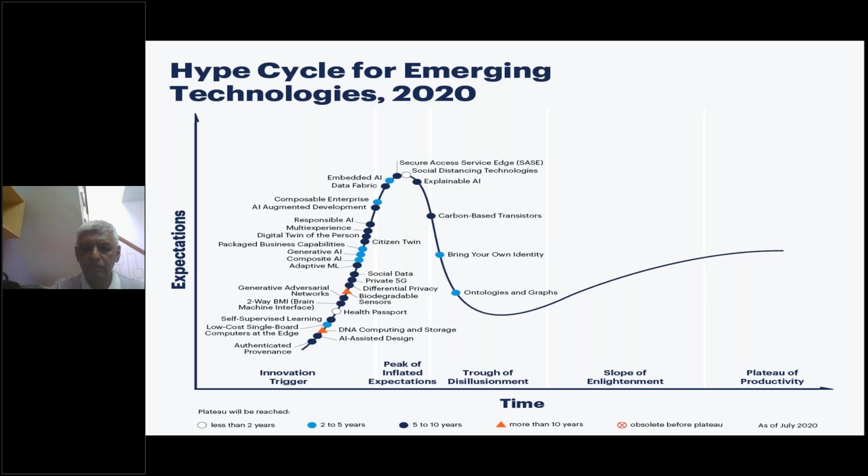But then you can see that most of them last year were still projected at the extreme left end of this curve, and it will go through this typical behavior. Everything goes through this cycle, and this is the typical hype cycle. You have an innovation trigger, then it peaks with inflated expectations. Then there is a trough of disillusionment which it will go through, and then you will have a slope of enlightenment and the plateau of productivity.

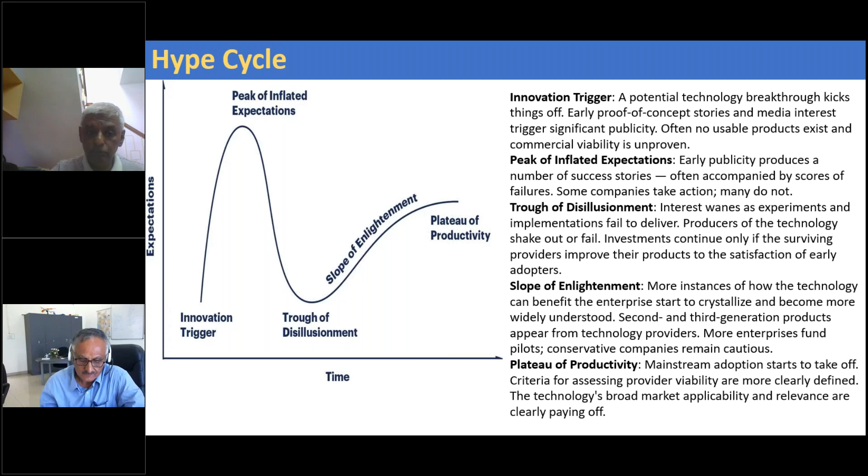So you will have to wait for all these emerging technologies to go through this typical cycle. Many of them will fall apart, they may fall at any of these stages. But if you come to the plateau of productivity, that is when mainstream adoption starts to take off, and that is when we say a real technology is successful. Sometimes some of them, though they may fall off at the trough of disillusionment, 5 years later you will find that it is coming to the plateau of productivity. So there are many different things.

The technology adoption also follows a similar pattern. We have innovators, early adopters, the early majority, the late majority, and the laggards. This is how it is, this is the nature of things. It's not about why somebody - each industry will have its own technology adoption life cycle. These are very important as we talk about emerging technologies and the adoption of technologies.

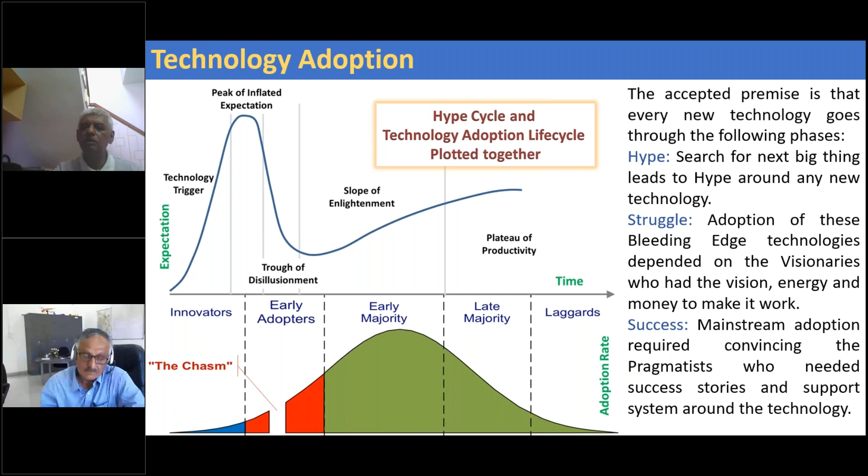This is where I think it resonates very much with what Mr. Krishnan just mentioned - considering that the student audience is the majority here, you will have to be patient, you will have to be willing to go through this cycle. Technologies take time to succeed. So as long as you believe in that, and you have the patience, the perseverance, you will see that you will make a big difference.

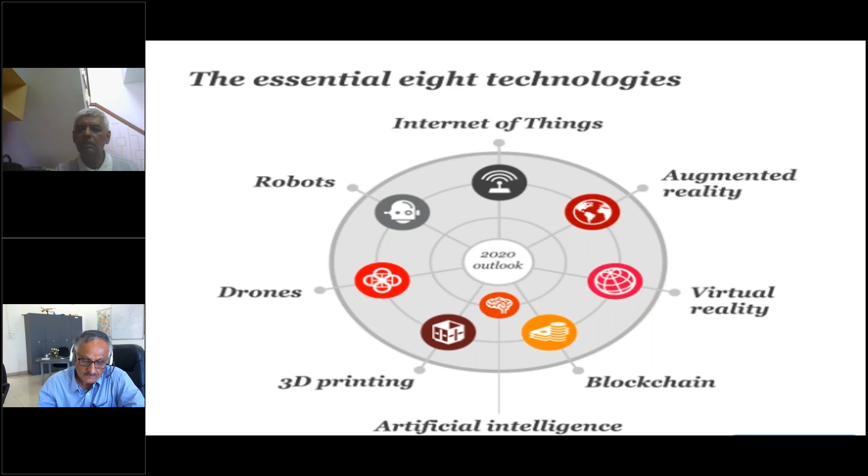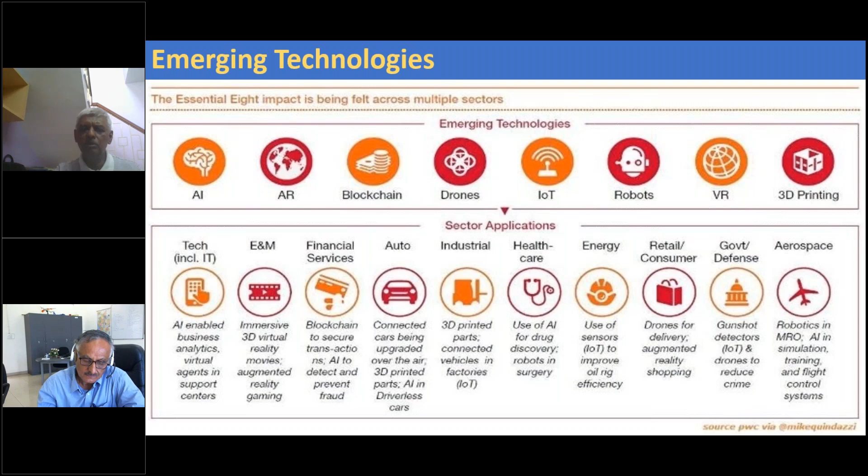You've all heard about the essential 8 technologies - the last 8 to 10 years have been all about it: IoT, robots, drones, 3D printing, AI, blockchain, virtual reality, augmented reality. And they are impacting every sector. You can see aerospace listed on the extreme right, but it also impacts financial services, automotive, industrial, healthcare, energy. These 8 emerging technologies, and you can branch off into many more, impact every sector, and that is why it has caught the interest of a large majority of the world. You're seeing more and more being done, talked about, and deployed in these areas.

Those who are still behind will certainly come to that. But while we talk about all the digital technologies and about AI and ML, which we will certainly touch upon a little later, the bigger thing is also, let's not lose sight of the core of many of these. It's about materials, it's about manufacturing, it's about instrumentation, it's about electronics. It's about the engine dynamics, everything.

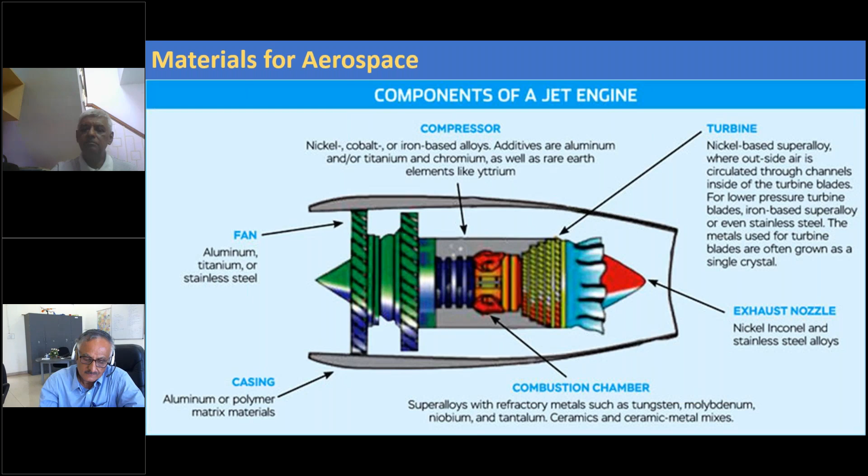So here is a typical components of a jet engine, and you'll see the kind of materials which are getting used, from aluminum to titanium to nickel to iron-based alloys, and the Inconel super alloys where the high temperature is there. And we are starting to see that the material scenario is also changing. Newer materials are coming, they are getting used.

Here is an example, classic example of how the fan blade, which is right at the front of the engine. So as you board the flight, if you can always see the engine, what you see is the fan blade in front. So GE introduced the composite fan blade first ever, a few years ago for the GE90 engine. It was 4 feet long, weighing less than 50 pounds, made from carbon fiber and toughened epoxy matrix. Delivers double the strength and 1/3 the weight of titanium.

So for an aerospace industry, for commercial aircrafts or even fighter aircrafts and everything, you see that the biggest thing is the weight of the aircraft. Every gram you can reduce in the overall weight of the aircraft gives you higher fuel efficiency, gives you higher ability to higher thrust, and so on. So weight becomes very critical.

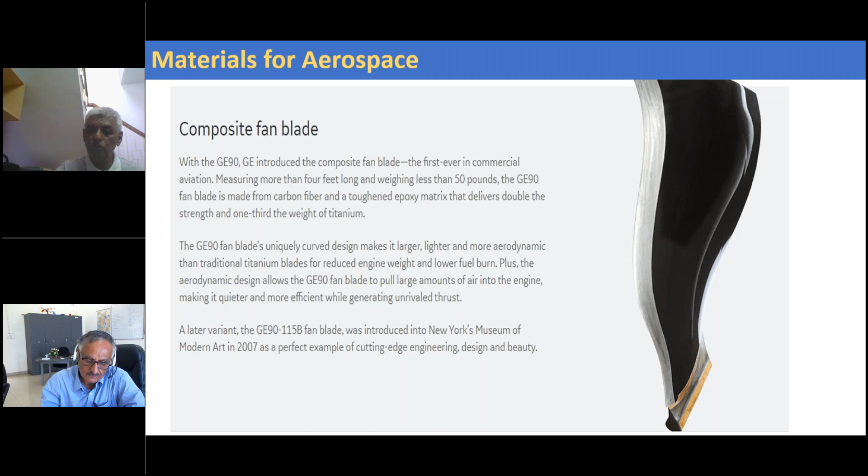So the more and more you can change the materials which are today being used to lighter materials like composites, you will have a different world in a few years. So it has a very unique design, and this is considered a work of art. It was actually there in the New York Museum of Modern Art also. It looks beautiful. Those who get a chance to look at it, please look at it.

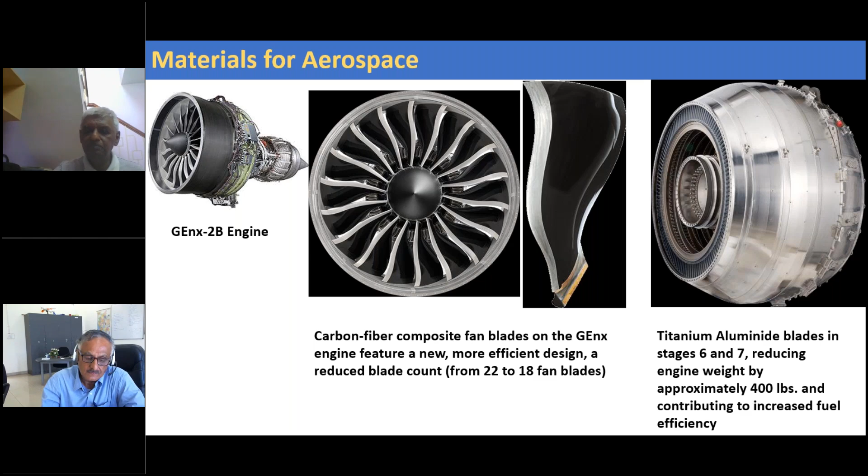So here is how carbon fiber composite fan blades on the GEnx, we were able to reduce the blade count from 22 to 18, which means very significant reduction in weight. Look at how titanium aluminide blades in stages 6 and 7 have helped reduce the engine weight by about 400 pounds, which means a huge savings in fuel. So fuel, in commercial airlines and commercial aircraft, becomes the central theme, because that is the biggest cost component of any commercial airline.

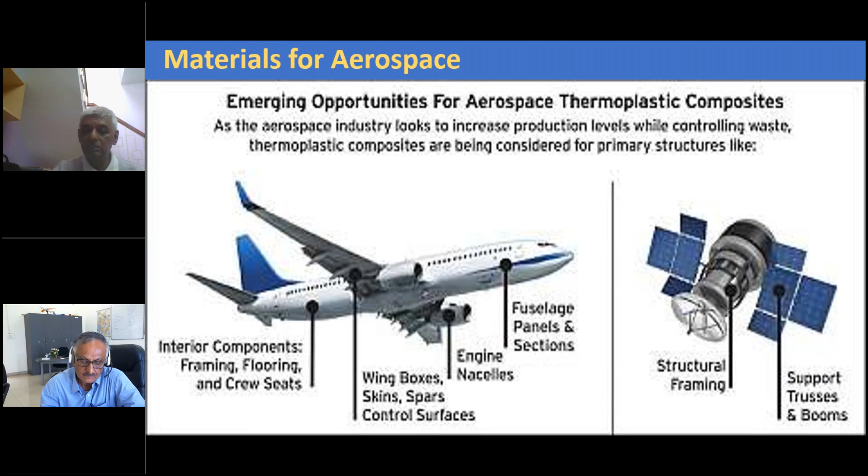Again, we are looking at the world where we are moving from thermosets to thermoplastic composites. Huge amount of research going on, lots of opportunity for students in the materials world who want to take this up, because thermosets unfortunately have the disadvantage that they cannot be recycled. So we are already facing a crisis in the wind industry. Very recently also there was a report where we have to just dump the wind blades, which are also made of thermoset plastic glass fiber composites, in the landfill, and we will soon have an environmental issue. So we have to move to thermoplastic composites.

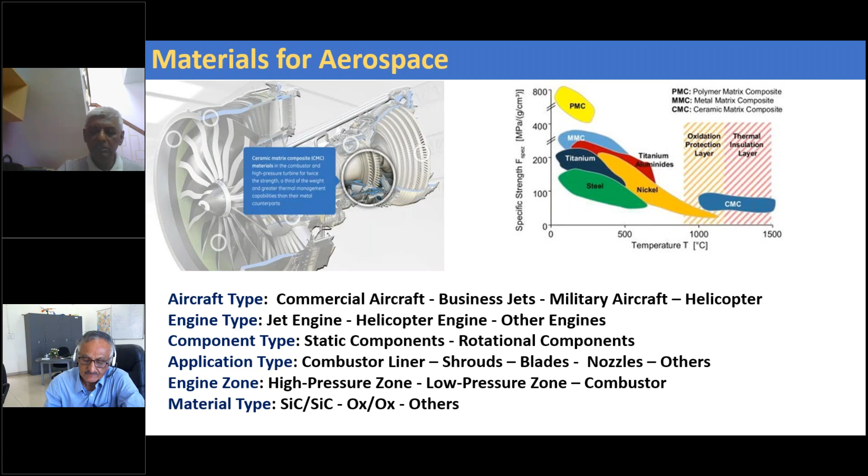So if you look at it, the commercial aircraft first, it will eventually come to the military aircraft at some point in time. It started with the jet engine, will certainly move to the helicopter and other engines. Currently it's being used for static components, eventually it will move to the rotational components. It started with the liner and shrouds, but go to the blades and nozzles and others. And today, obviously, it's in the high pressure zone and combustor. So currently, the silicon carbide SiC/SiC, as we call it, is the most popular CMC. The oxide is also becoming very popular. So this is the kind of changes which is happening in the material world.

In the manufacturing world, additive manufacturing, as several people refer to as 3D printing already, is changing the world on how we are manufacturing things. It's an emerging technology which is going to disrupt the entire world of manufacturing. There's a lot more, which people are studying. I'm not going to get into the details, but this is one emerging technology which is going to disrupt the way we do things.

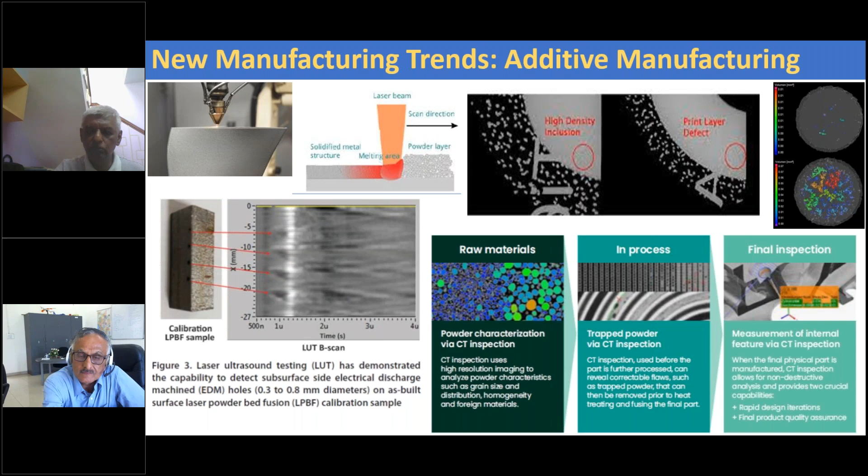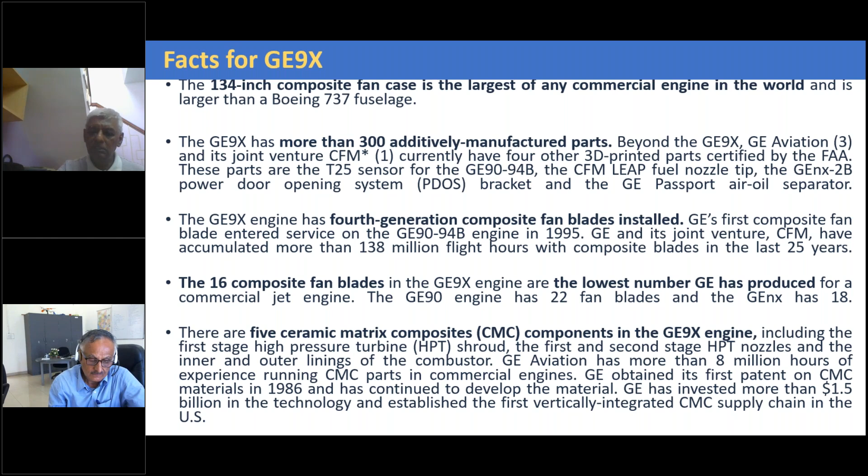This also shows that these are not just R&D topics. It has taken several years to bring it into reality. So today we have engines flying with composite fan blades, additively manufactured parts, and CMC components.

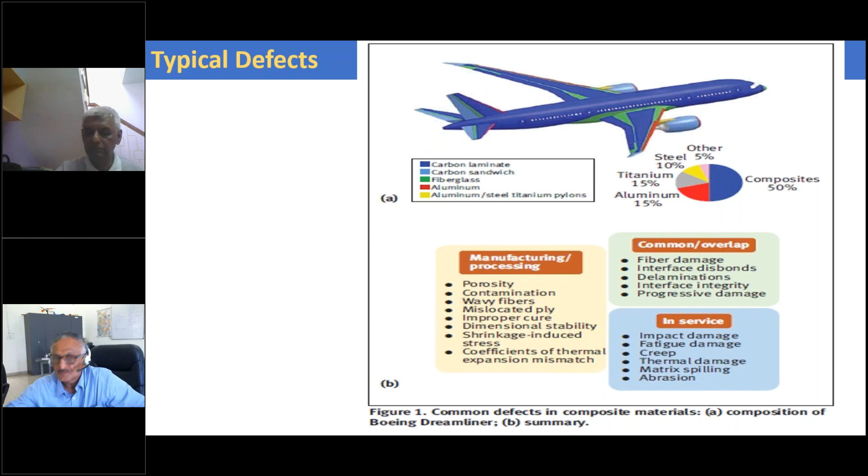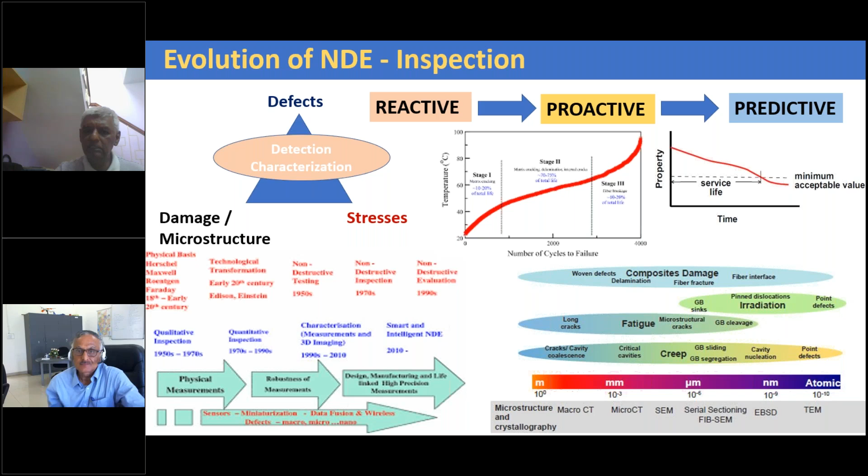You have to have quality control inspection methods which can successfully inspect these composites, both during manufacture and in service, so that these planes can fly safely without having to worry about any kind of damages. I won't go into the details, but this is how damages evolve in composite materials, and we need inspection methodologies to address all that.

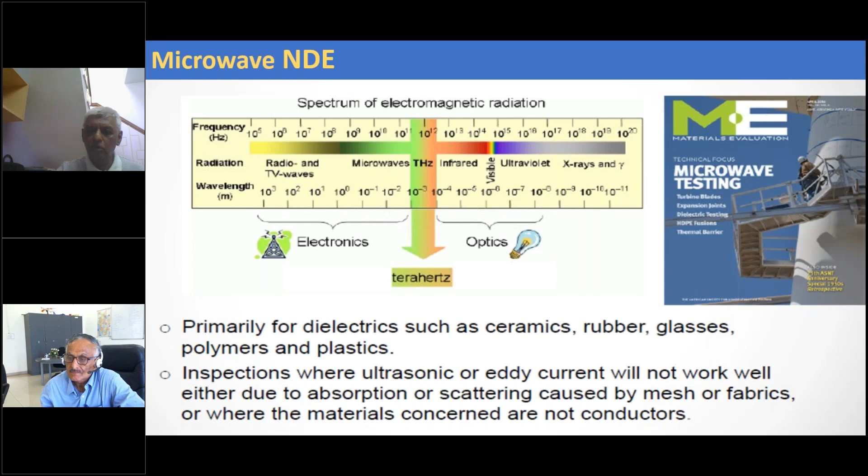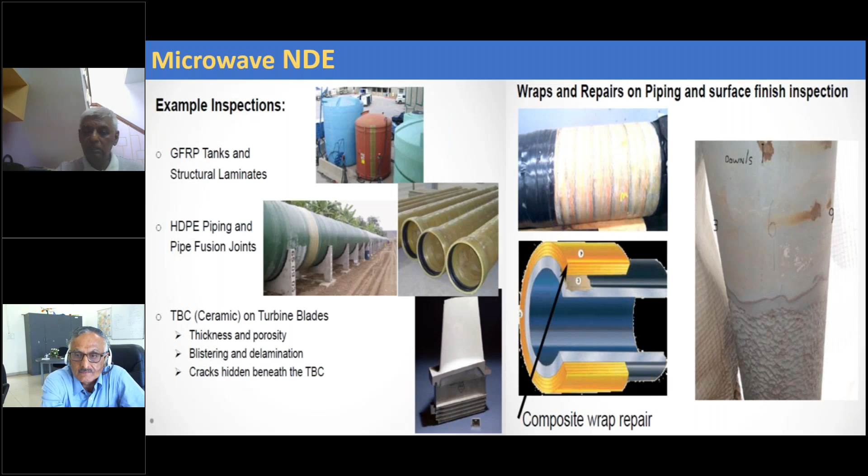Just referring to a few very important new inspection methodologies that have become popular - microwave NDE. You might have all heard about ultrasonic, eddy current, optical, and many other methods, but here is a newer method, microwave NDE, very good for composite inspection. This is becoming very popular for composite inspections in both the aerospace and other worlds, and it's very good for coatings also. You can see at the bottom how the thermal barrier coating, which is a ceramic, can also be inspected using microwave NDE.

Again, everything I'm mentioning - there's so much to do. What I'm showing is just the tip of the iceberg. For the student community, those who want to pursue research, MTech, PhDs, there are tons of things to do in this area which you can pursue.

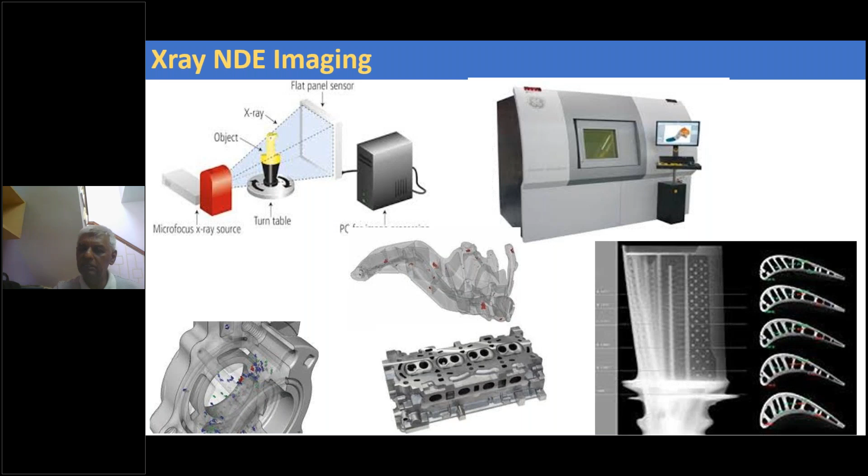Here is a classic example of how imaging using X-rays, which always used to be 2D, has now moved to 3D with industrial computed tomography. You can see this beautiful image on the right-hand bottom of a turbine blade - this is actually an aircraft engine turbine blade. You can see the kind of details which no other method can provide. The machine at the top is the CT machine which actually imaged this, and you can see the cross section. Just like a doctor takes slices when imaging a brain for a tumor, you can take cross sections in this 3D imaging and find extremely fine micron-level defects, which is very important for the aerospace industry.

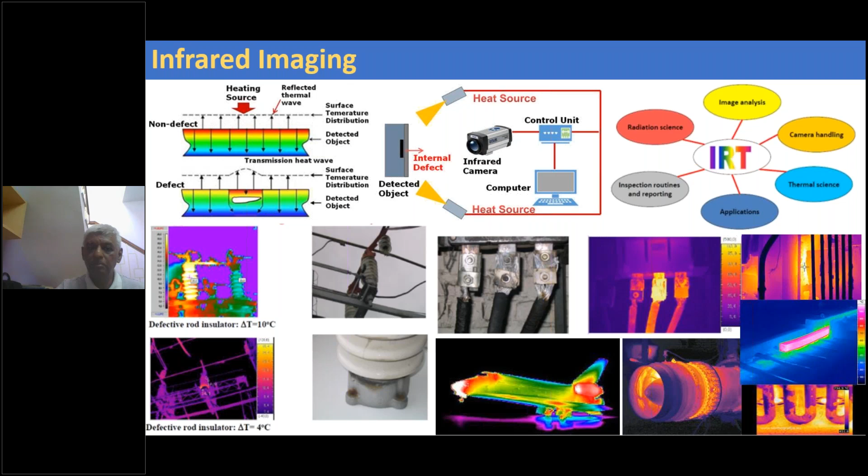Infrared imaging or thermal imaging is again very popular for imaging of composites. With the increasing use of composites in the aerospace industry, this will become a nice imaging tool - non-contact, wide area, very fast, very good to interpret - and we have so many different methods in that.

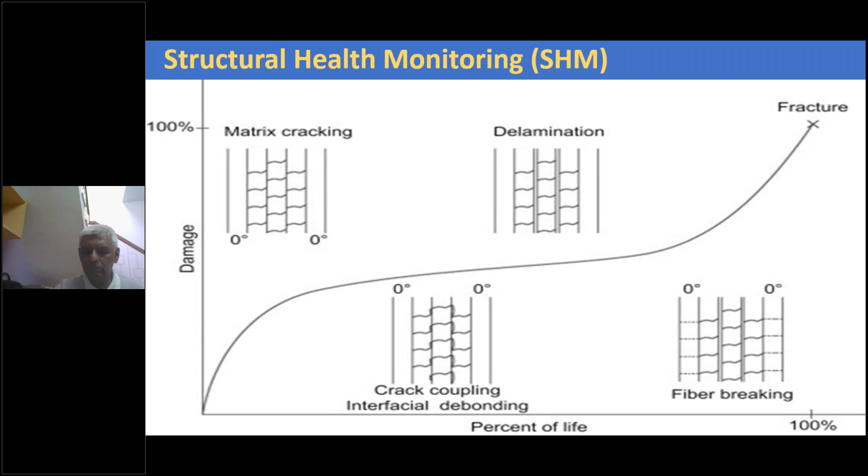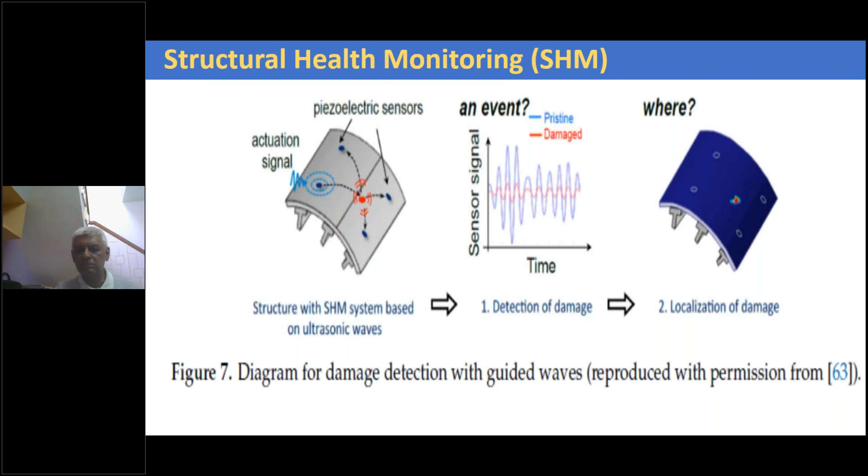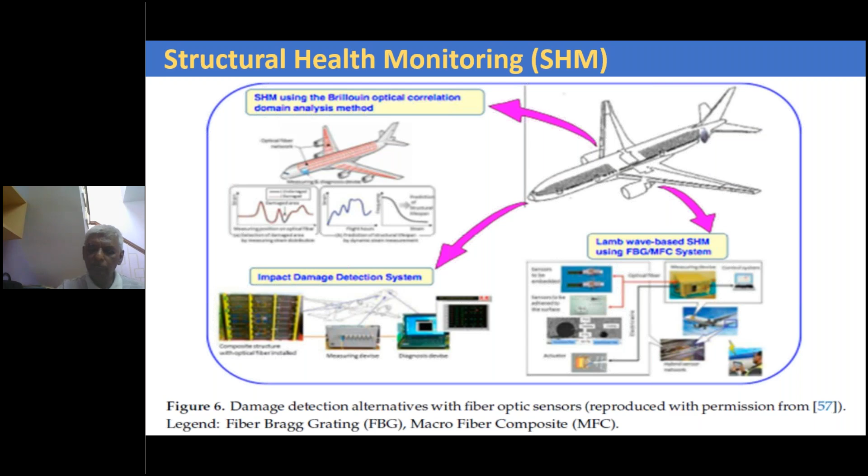When you talk about NDT or inspection, it is usually done in a static way. But you can move to structural health monitoring, where you embed sensors on the components and do continuous monitoring. This is again very well established. Our NAL, the Indian Institute of Science, and many other institutes have made a lot of advances in this area using fiber Bragg gratings, and we are now moving to different kinds of sensors, because this can monitor large structures like aircraft continuously and give advance warning before any potential failure. There's plenty still to be done in this area. So that's a quick touch on materials, manufacturing, and inspection.

Now we'll move to the emerging trends in the whole digital world we are talking about. We call it digital transformation, Industry 4.0, which was referred to by Chandra Sundaram and Dr. Kota as well. So the world is getting digital, there's no doubt about it.

There are different terminologies, but basically Industry 4.0 is driving us to utilize these technologies, be it AI, advanced robotics, additive manufacturing, digital twins, and analytics, to bring everything together to make this world a better place in terms of quality products and in terms of utilizing information, which is available in much greater quantities today, what we call big data.

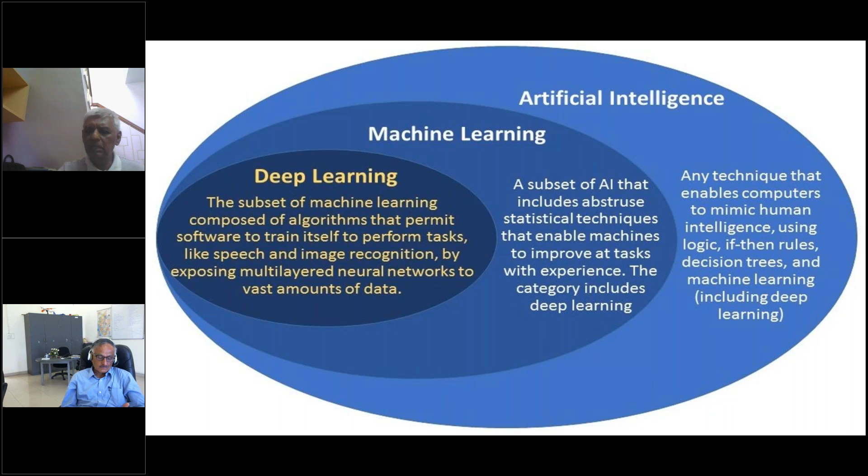A lot of discussion happened about deep learning, machine learning, and AI. Like it or not, these are going to be the core of our framework, and they make our systems efficient. So why not?

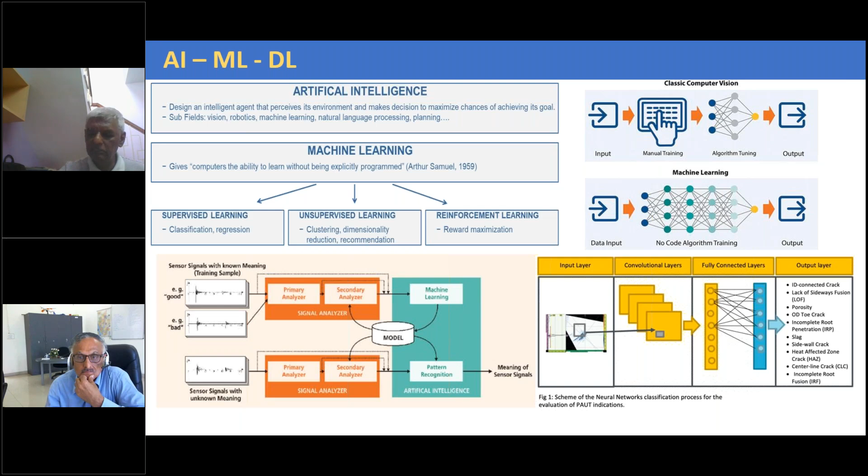Here is an example of how we have used it for ultrasonic inspection. When the data comes out in the form of a signal or an image, we have used AI and machine learning to completely automate that inspection process and come to decision making.

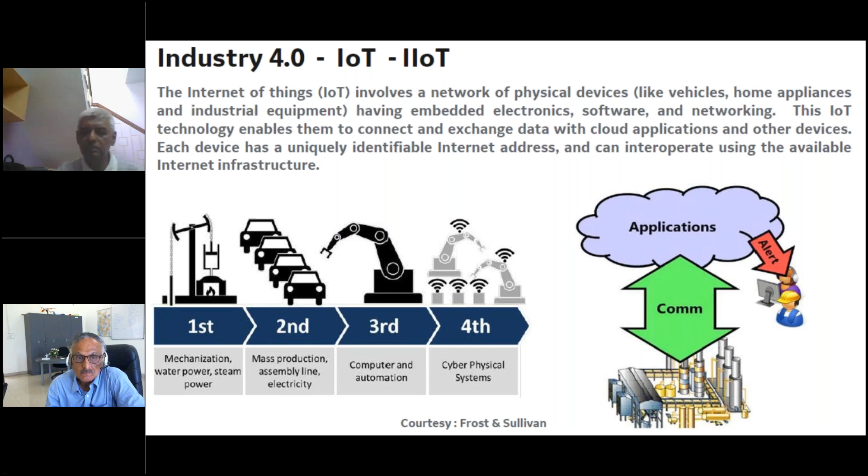Of course, we talked about IoT. The sensors world cannot survive without IoT in the near future. So IoT is going to be another very big thing, which is going to be a breakthrough for all of us. Of course, you have all heard about Industry 4.0.

So when you talk about materials, they will again utilize the fundamental technologies of Industry 4.0 to their advantage, in how AI is going to be used in material development, newer material development, and so on.

And of course, one of the big things for Industry 4.0 is automation. Automation in every sphere, be it in manufacturing, quality control, analysis, doing the inspection, or coming to the decision-making process and so on.

Automation is the buzzword, and why not? Because it provides speed, quality, productivity, reliability. All these are drivers. Safety, harsh environments, nuclear industry, and even many other industries like chemical—that is the driver for automation.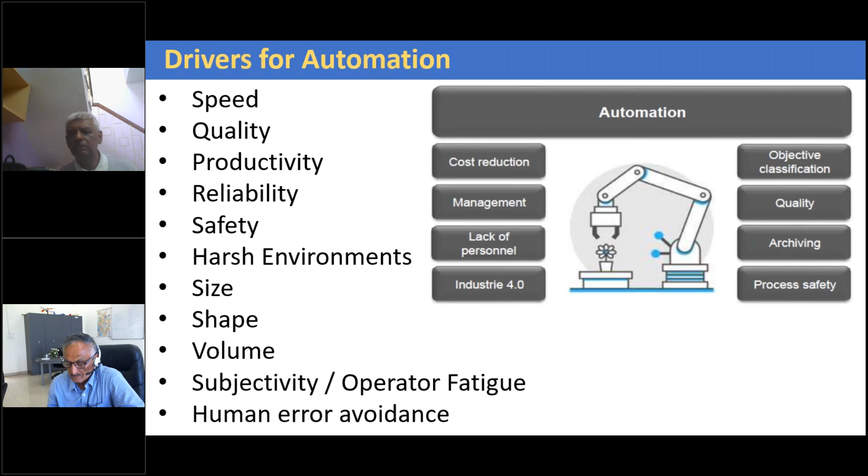Even in aerospace, large areas is what we have to inspect, and that is the driver for automation. And of course, very intricate—when you talk about an aircraft engine, we have extremely intricate parts to be inspected inside, probably very difficult to do without automation.

Okay, I have quite a few videos, so let me see. I'll probably run a few of them. In the interest of time, we may not be able to show all, but this is the concept of how Rolls-Royce is utilizing it.

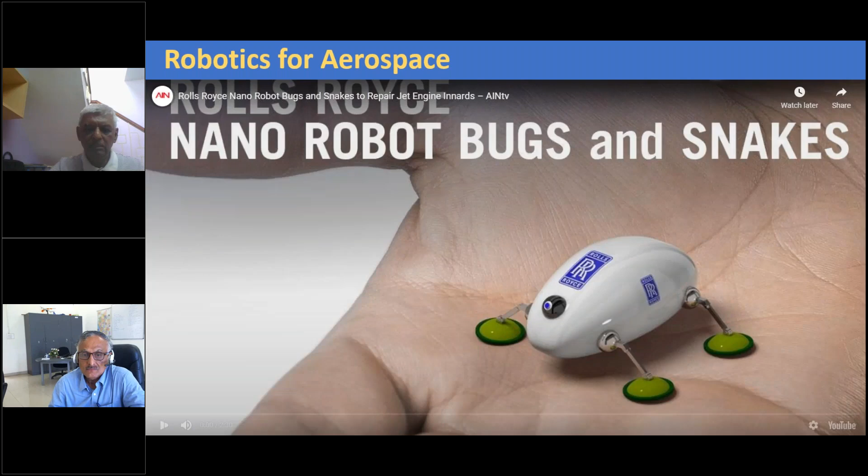So that's an example of snake robots and swarm robots, which again was referred to.

But engine maintenance - one of the biggest issues for commercial airlines is downtime. Every minute a plane is on the ground, the airline is losing money. They have to keep the aircraft flying as much as possible continuously. If you had to rip open the engine every time to do the inspection, it takes several weeks or more. So the more we can do this kind of automation, using advanced technologies like snake robots to do the inspection without removing the engine from the aircraft, you'll really help the airlines make more profit while keeping the aircraft flying.

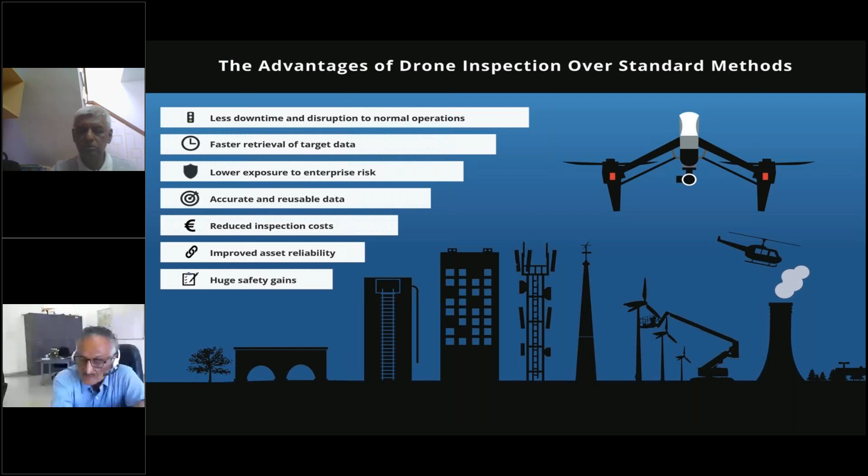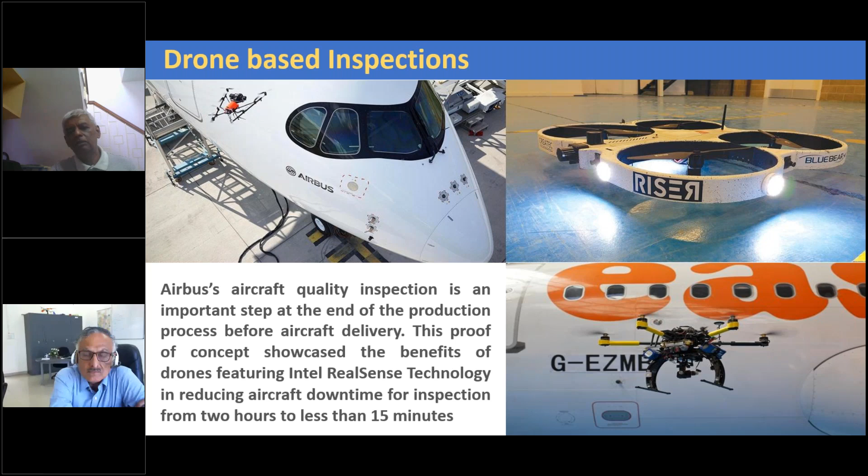Similarly, a lot was talked about drones. Drones are also being used very effectively. I'm looking at it from the viewpoint of how inspections are done - an aircraft covers a large area. Airbus has used drones to do quality inspection at the end of the production process before aircraft delivery. A visual inspection using a camera for the whole aircraft used to take two hours, but now they are bringing it down to close to 15 minutes or less. So here is how drones can be used for aircraft inspection very, very effectively.

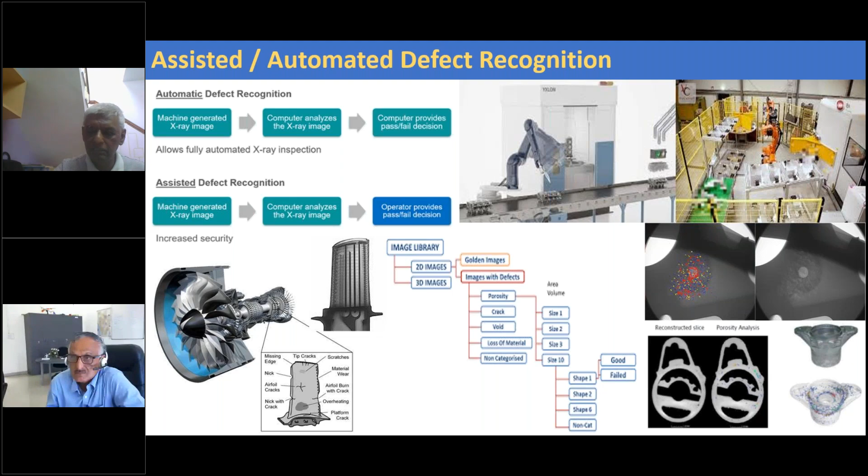Of course, I talked about automation. Automation is also in how you inspect components like the turbine blade - I talked about how it can be entirely automated. So what we call ADR, assisted or automated defect recognition, uses image processing, AI and ML techniques, where the defects in the turbine blade, once we take the radiography or CT image, are entirely automated. So automation is there everywhere.

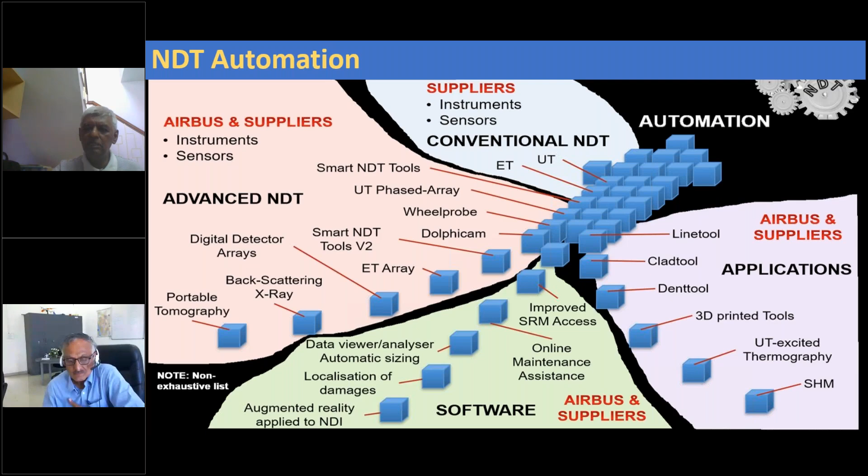Here is a sample of how Airbus is viewing it. Everything you can see is a very complicated thing - can't talk about it much, but you can see that every single action is getting automated, either by Airbus themselves or by the suppliers, be it the instruments, the sensors, the software, or the applications. So a very, very ambitious roadmap, which clearly shows we are thinking far ahead about how we can automate the entire inspection process.

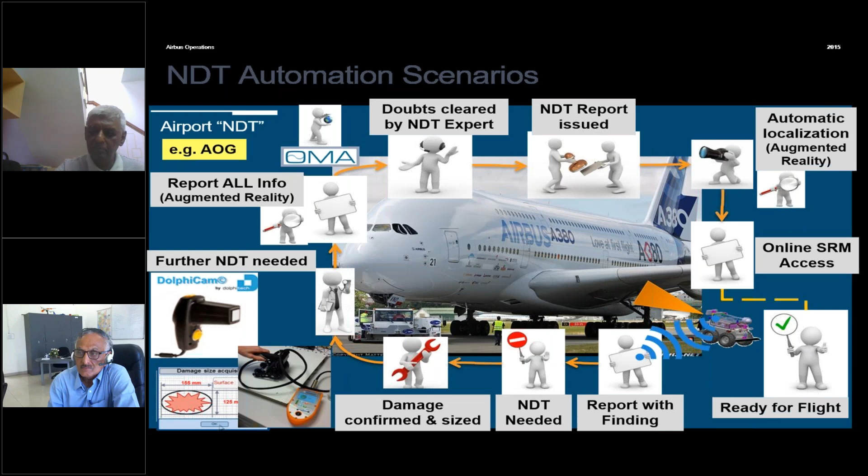Here is also, again, how post-inspection the data is going to be analyzed and reported, and finally you have to figure out whether any damage has happened. If damage is there, what is its size, whether it's harmful for the aircraft, and so forth. So here is again a convergence of so many different technologies, including something capturing a lot of imagination now - augmented and virtual reality.

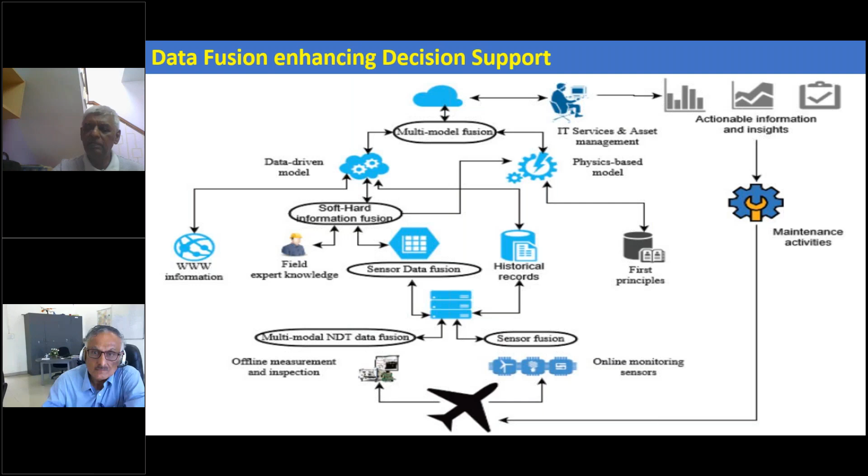When you bring all these together, we have to use something called data fusion. When you have so many technologies, the information we get is complementary in nature. Here is a classic example of how offline measurements and online sensor data are combined through sensor data fusion, again using a lot of AI, ML and many other technologies. Eventually the final goal at the top is actionable information and insights, which drives the maintenance activities.

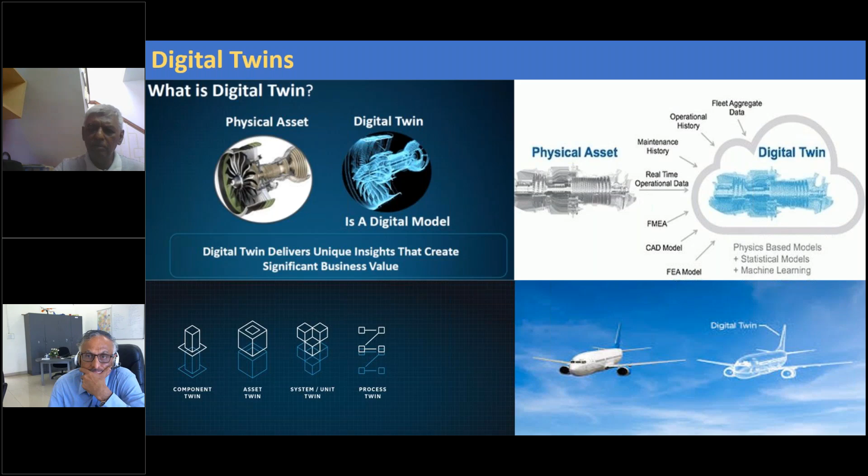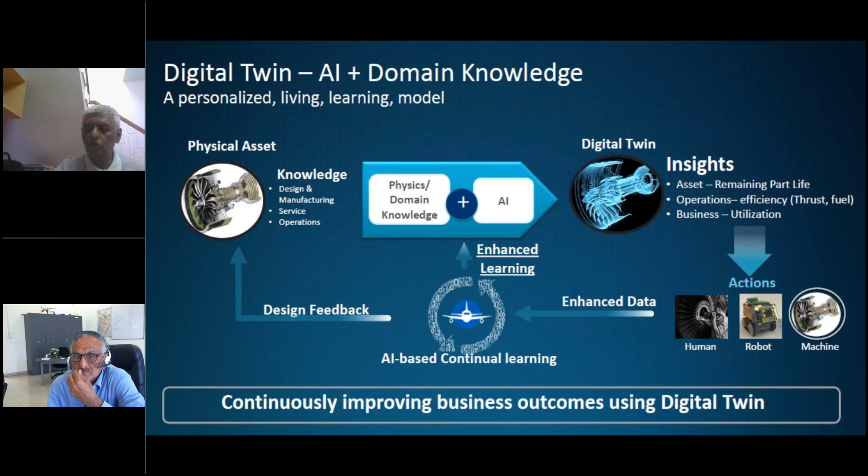We all again heard a lot about digital twins. Digital twin is again something that is going to disrupt the way we do things - basically having a digital model of a physical asset. The moment we have a digital twin, it opens up a world of opportunities on how we can improve the outcomes of anything we do. Combine the knowledge of the physical asset, its inputs in design and manufacturing, service operations, combine that with AI and enhanced continual learning, and you can get excellent insights which can constantly help improve the performance of your aircraft engine, aircraft, whatever you have.

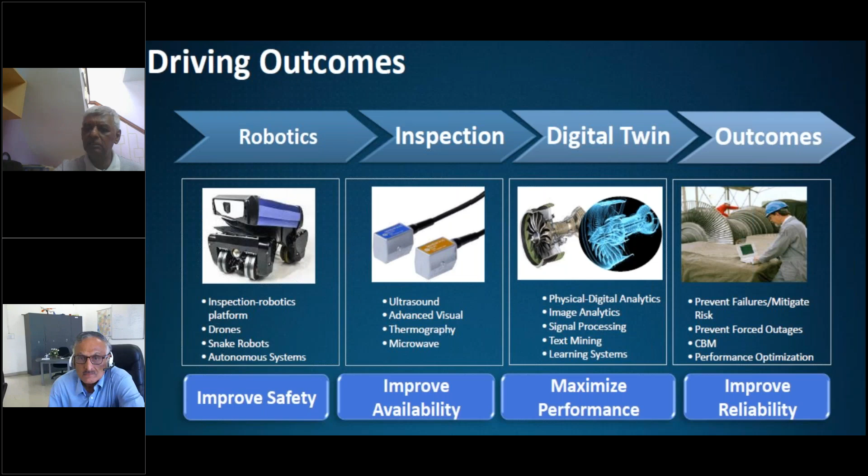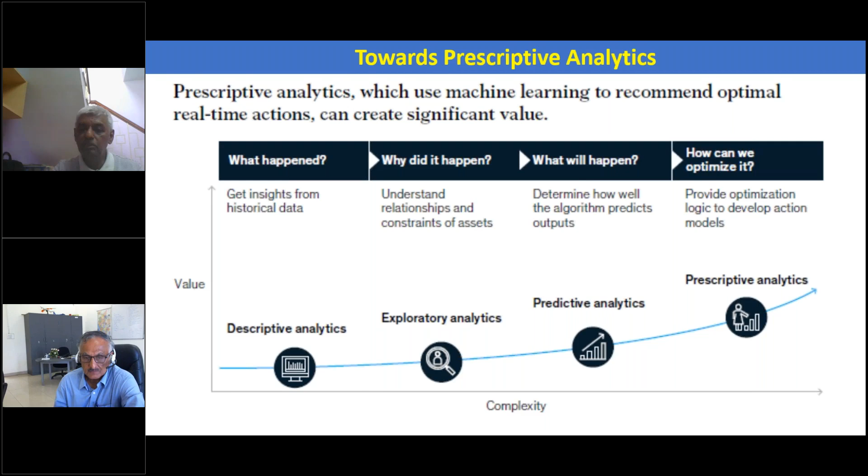So basically, at the end of the day, we are trying to see how we want to combine effectively robotics, inspection, and things like digital twin to get outcomes like improved reliability, maximized performance, improved safety, and so on. And then we are moving into a different world of analytics, where we are moving from predictive to prescriptive analytics, which is going to be used extensively, especially in the domain of maintenance. As you know, in aerospace, one of the biggest things to pay attention to once things are in service is effective maintenance.

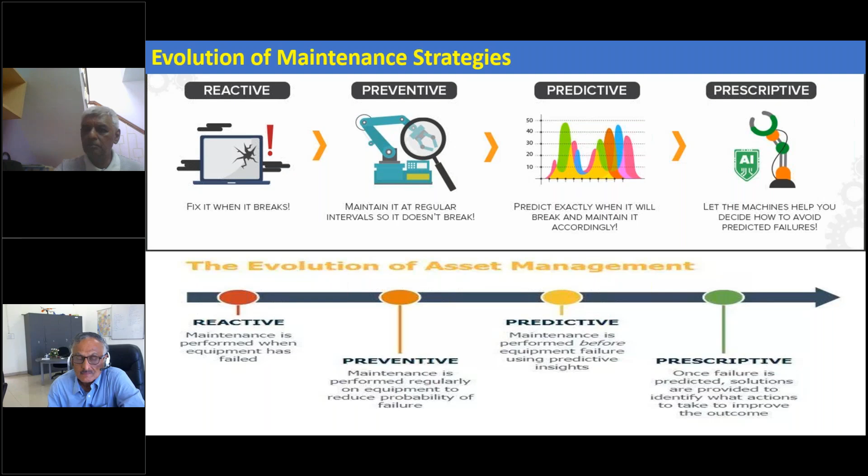So we have moved from reactive to preventive to predictive to prescriptive maintenance, which means the machines themselves help you decide how to avoid the predicted failure. That's like a dream come true, right? And it's not far away with the technologies we are seeing, that prescriptive analytics will be something you'll see very much.

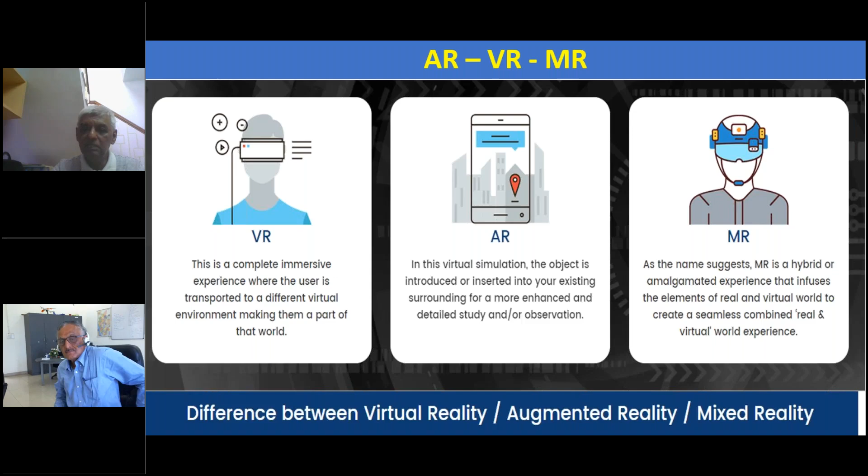And then, of course, we have gone into this world of augmented reality, virtual reality, and mixed reality. In the interest of time, I'm not going to get into the details, but lots of stuff is available in the literature, and these are now starting to be practically used. Even in the aerospace ecosystem, it is being used everywhere - be it the technology, products, service solutions, applications, components, including marketing and finance.

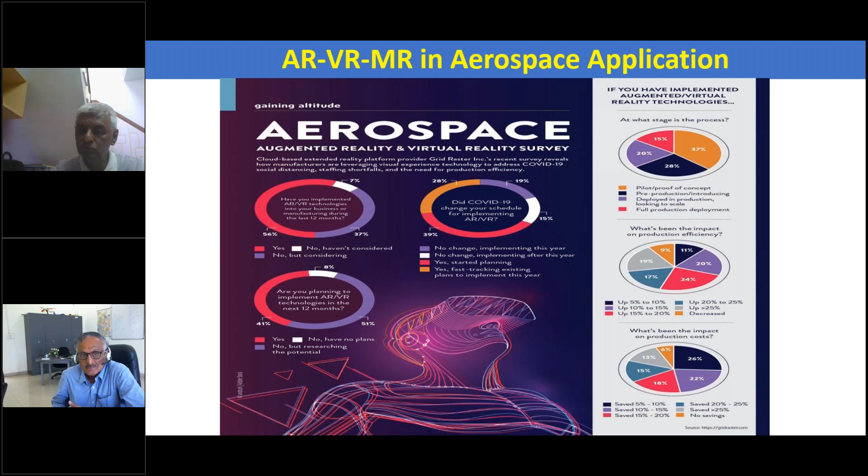This is just a snapshot of one of the surveys of how aerospace is trying to use augmented and virtual reality. You can see from the right-hand side pie charts that already a big chunk of the industry has either utilized it, is planning to use it, or is in the process of doing pilots to get where they want. It has great applications in manufacturing, in MRO, in parts and supply, even for complex assembly - aircraft is really a complex assembly.

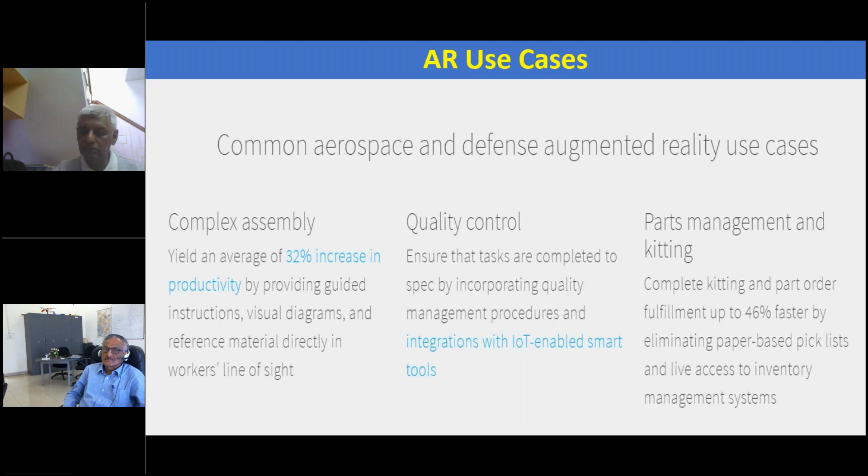They have already demonstrated a 32% increase in productivity by providing guided instructions through these AR kind of glasses. Quality control, of course, parts management and kitting, maintenance, repair, airline ground operations, training and upskilling - plenty of applications there, which again in the aerospace industry, for ground maintenance staff and engine maintenance staff, everybody needs a lot of good training.

So here is, I guess, one more video which we'll play. Probably that will be the last one we'll play.

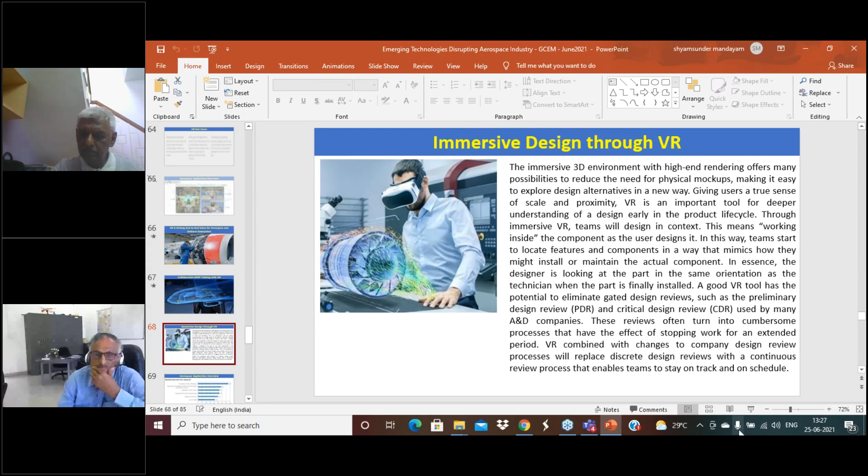Okay, so that hopefully gave you a feel of AR VR. There's lots more - I have many more videos, but in the interest of time I don't think I'll be able to play them. Anyone who is interested can get in touch with me and I can share. Just for information, we ran a 15 hour, 1 credit course on augmented and virtual reality for aerospace in one of the engineering colleges in Tamil Nadu just last month. We really collected a lot of information and figured that out, so we can always discuss more on that.

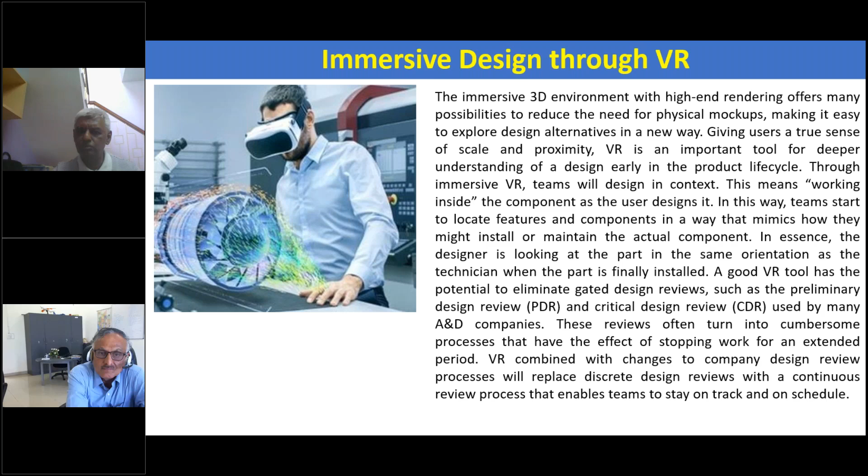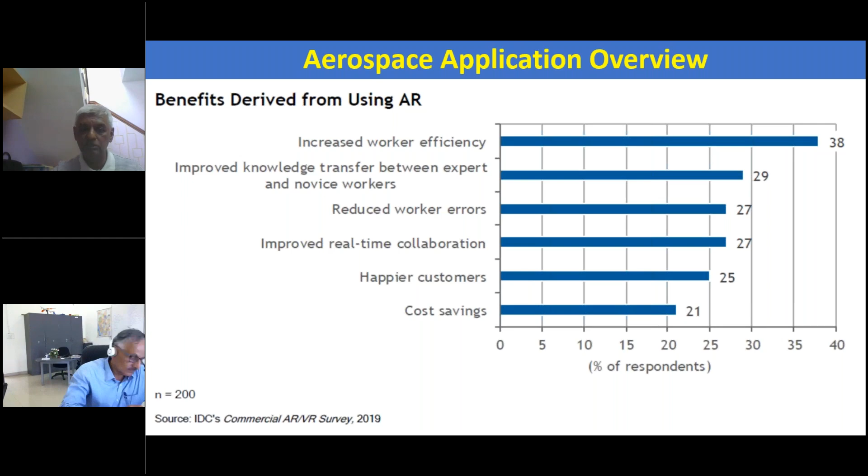So immersive design through VR is a beautiful way of really seeing through an engine, which is a very complex part of the aerospace industry, and really helps in design reviews and many other things. Already people have very clearly shown there are lots of benefits - worker efficiency, knowledge, reducing errors, which is very important, improving real-time collaboration, especially in the COVID situation when people were spread out, and of course happy customers and cost savings.

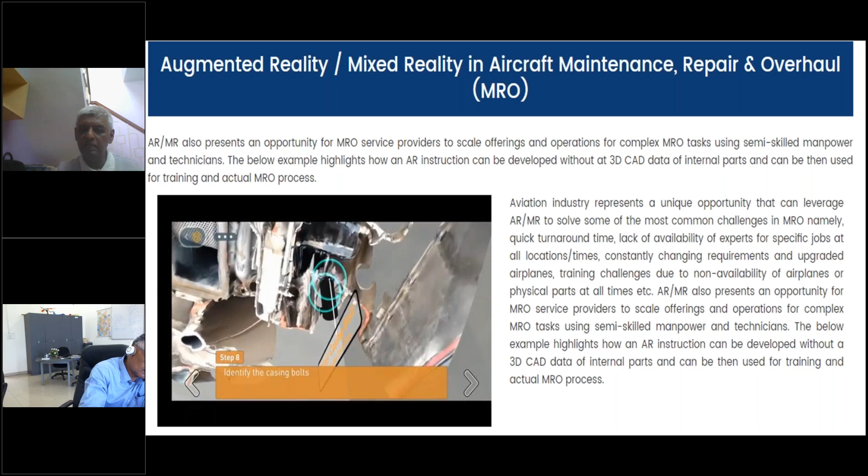It does solve real-world problems - it's not a fantasy anymore, it solves real-world problems for everybody. So it can be used, of course, in aircraft MRO, and many have already started adopting that in various ways - for training their people, for having a digitized version of the manuals which can be put on AR glasses, so you don't have to carry bulky stuff and everything is guided.

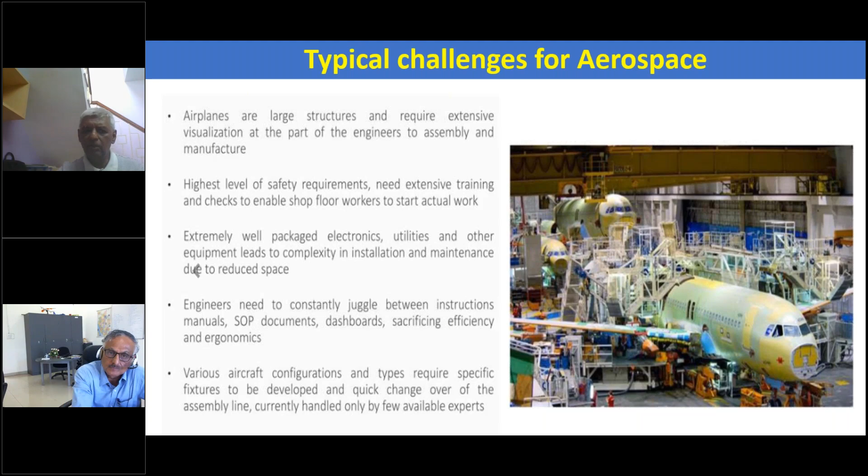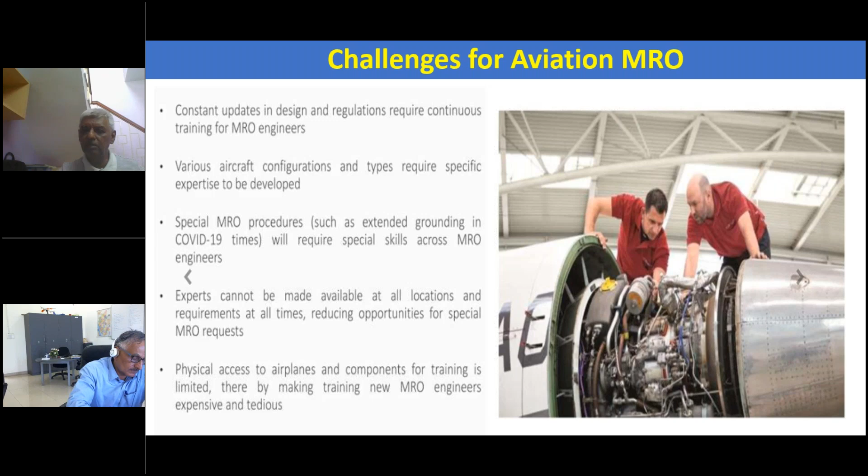So typical challenges in aerospace - why AR VR becomes very useful - is large structures, lots of visualization, assembly and manufacture, safety requirements, and many of those things. This really helps because MRO procedures also keep changing as directives come, the ADs come from the DGCA or anybody else, and you need to constantly do different things.

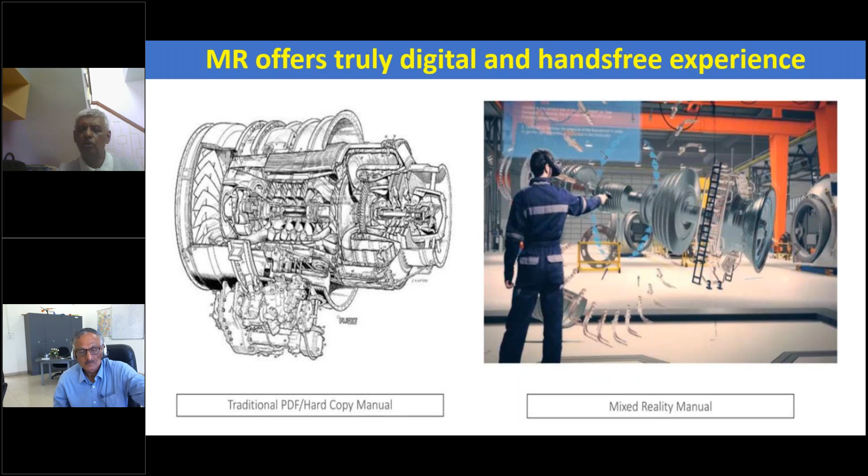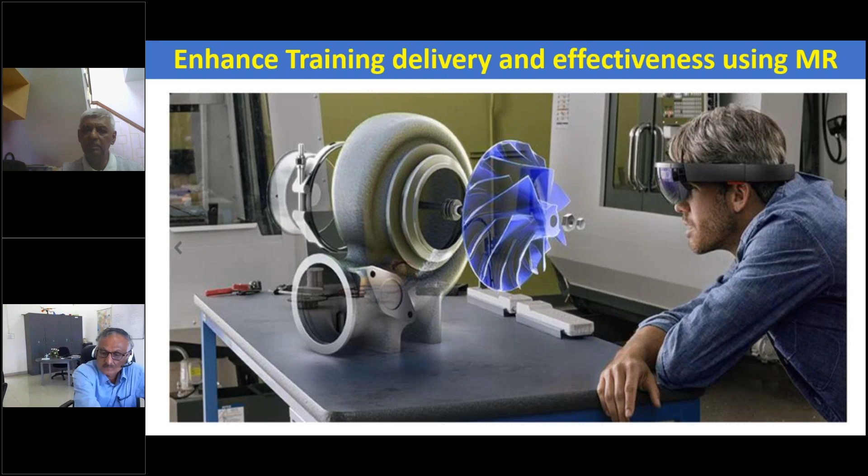So here is how mixed reality, where we combine both augmented and virtual reality, can give you an entirely hands-free experience of looking at a very complex engine structure, doing maintenance. Here is how digital data is superimposed on physical objects, making your life easy to visualize things. When designing engines and various components and how it goes into the assembly, it can really enhance the training delivery and effectiveness using mixed reality.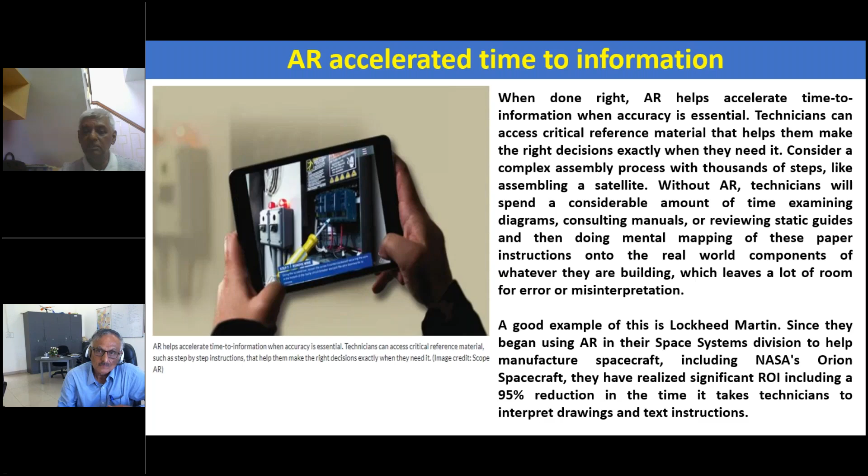And of course, the biggest thing is that it accelerates time to information - you can get everything very, very fast from the field to the control room and wherever you're doing, eliminating all the manuals. Lockheed Martin, as they say, has been using it for their space systems, and they have included a 95% reduction in time it takes technicians to interpret their drawings. That's a huge reduction in terms of efficiency.

The COVID-19 pandemic, while it has caused us a lot of distress, and yes, we have lost people, we have lost man hours, economy has gone into doldrums. If you want to look at the brighter side of things, it has helped accelerate many of these disrupting technologies. Many of these disrupting technologies people were forced to use, industry was forced to use. What would have potentially taken several years for adoption, frankly, we have seen in the last year, many people adopting.

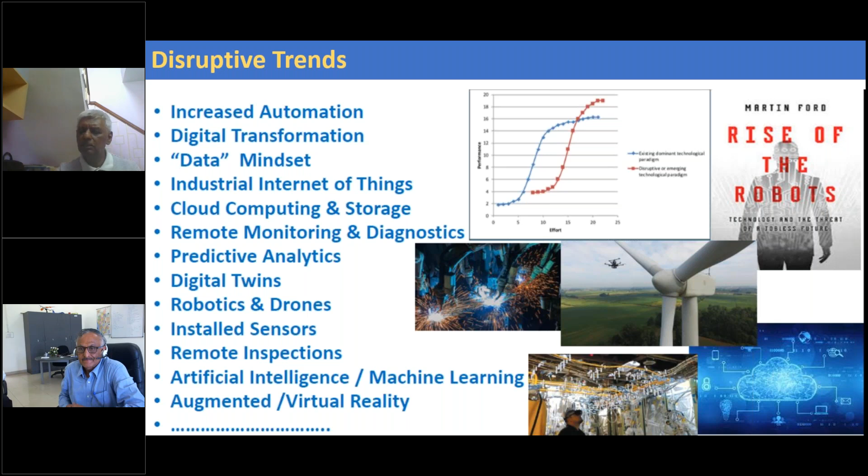So just to give you an example of how innovation opportunities were utilized during this pandemic. And there we come to the end. So there have been several disruptive trends, several disruptive technologies in the emerging technologies space, with a lot of scope to do tons of things. We have just touched the tip of the iceberg in what these technologies are and how they can be utilized, and so on and so forth.

So in summary, the pace of new and advanced technologies emerging is increasing rapidly. All indications are that they will disrupt the aerospace industry and other industries in a big way in the next 3 to 5 years, if not earlier. Interdisciplinary domains provide a huge opportunity for accelerated growth and impact.

In the context of students and academic institutions, that is the main thing to do. Everything today is interdisciplinary, and how best you can have curriculums which combine these things and give exposure to what the future will be demanding will be key for our Atmanirbhar campaign to succeed, because it has to be done that way. There is a need for additions to curriculum to expose students to the future.

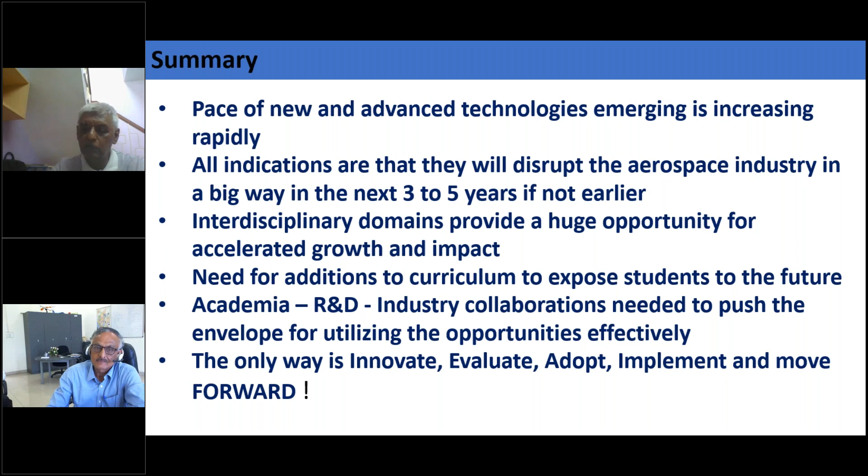Of course, nothing can work unless academia, R&D, and industry collaborations are pushed forward. As you saw in the technologies, the opportunities are huge, but unless we all collaborate together, there is not much we can do. So this is the recommendation: I would say we all have to work together, and the only way is to continue to innovate, evaluate the technologies, adopt them, implement, and move forward.